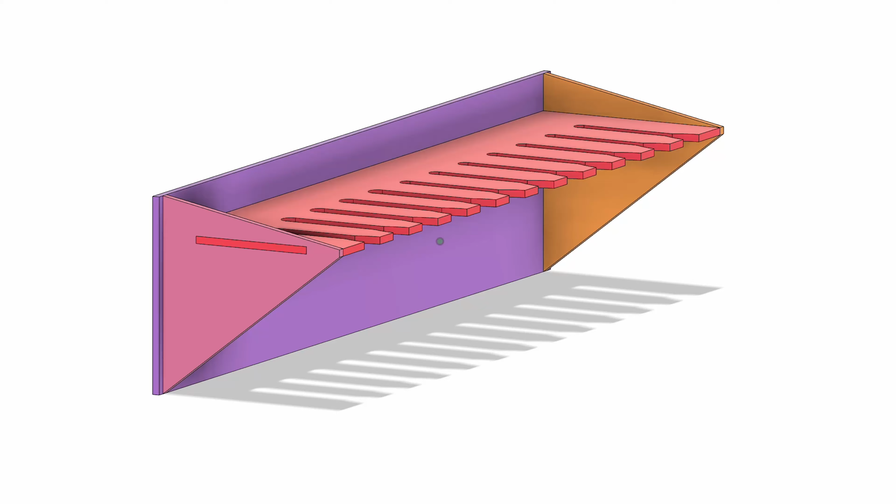In this Autodesk Fusion tutorial, I'm going to show you how to design a cable holder to cut on a laser cutter. We'll use parametric modeling features in Autodesk Fusion, as well as patterns and other techniques to quickly draw and then model a 3D form that we will lay flat for laser cutting.

The first thing to do is remember rule number 1 in Fusion: create a component. Select Create, New Component, then label your component. I'll call this Holder. Notice that now the component is activated.

I'll create a sketch and select the ground plane. I think it's easiest to use a center rectangle, so I'll go to Create Rectangle, Center Rectangle. That way, if I select the origin in Fusion, I can drag out and it's automatically centered.

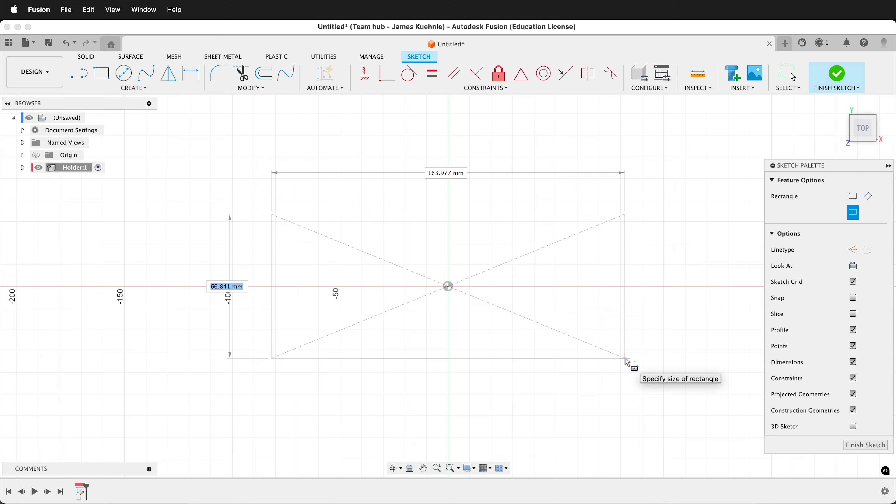I can type in some dimensions. For the depth of the rectangle, I'm going to make this 80. And for the length, why don't we start with 400? We can always change these dimensions later.

Next, I'm going to set a user parameter. Go to Modify, Change Parameters, click the plus button, type in Ply, then use 3 for 3 millimeters, and press OK.

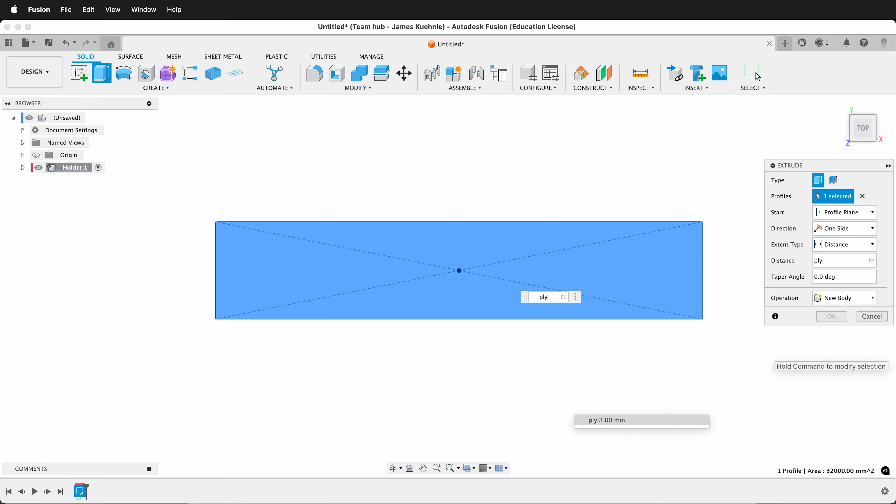Press E for Extrude. It's already selected, and for the distance, let's type Ply. Now we have a board that we can cut our slots into for our cable holder.

Now I'm going to create a new sketch, which will be used to cut out all the slots for the cable holder. Select Create Sketch, and instead of selecting this face, because this face might change, I'll select this ground plane. So now I can press P, project the geometry of the base plate, and press OK.

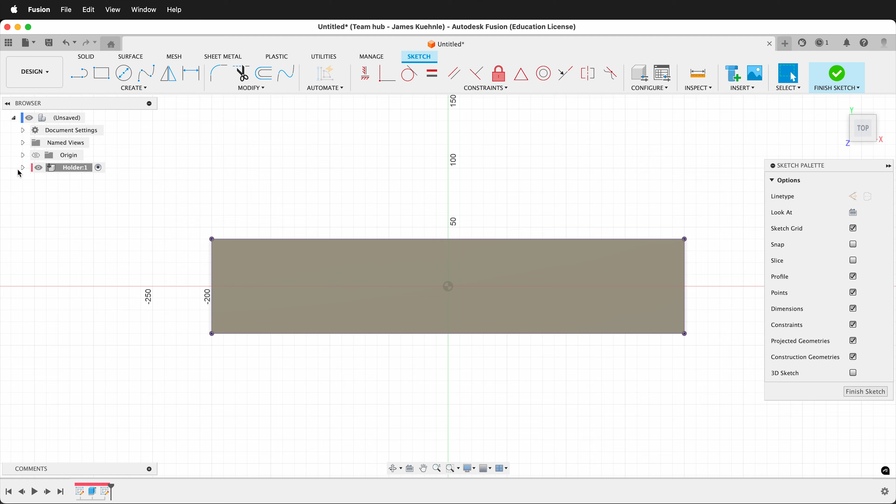If I look in my holder component, I can twirl out the bodies and hide the body, and I still have this geometry. Sometimes this is an easier way to work in Sketch. There's no correct way to model in Autodesk Fusion, but this can be an easy way.

Press R to get a rectangle and draw a rectangle. It doesn't matter what size yet. Now we can dimension it by pressing D, and here I'll type 40.

And for this width, for the first one, I think I'll do something like 7.8. We can always change it. This will be for larger cables and other cords. You should measure the cords and cables you have a lot of, and then type the dimension in for this.

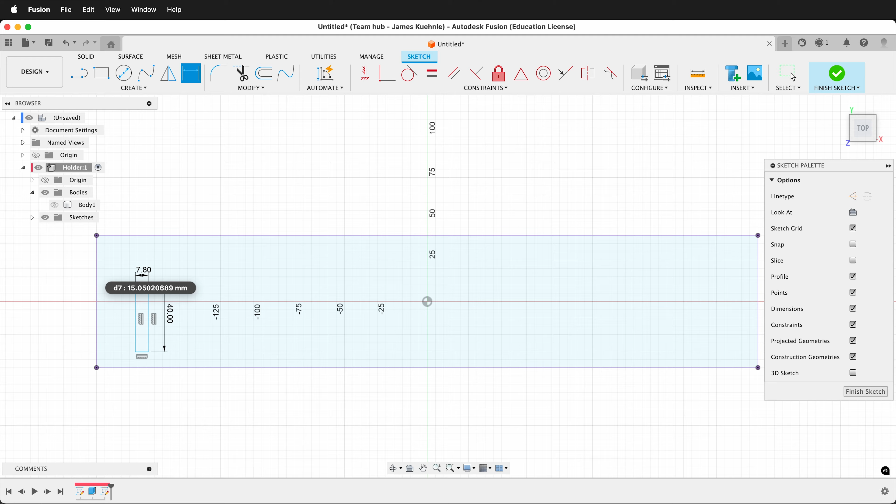We also want to add a nice rounded arc here. Go to Create Arc, 3-point arc. I'll select this point, then this point, and bring it up here. You can see it's locking to tangents.

But if you forget and don't lock it to the tangents, you can simply press Escape, click the tangent constraint, select the arc, and it'll automatically be tangent.

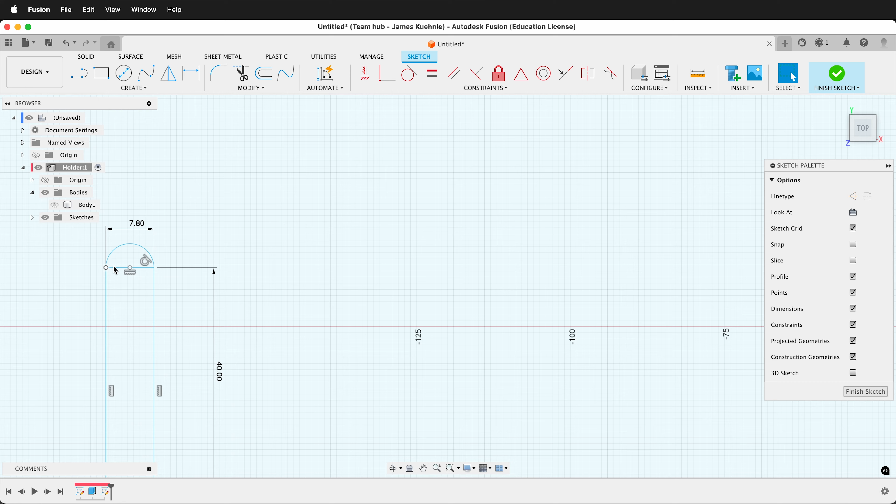One nice trick: select this line, then press X, and it will become a construction line. This is nice because we don't have to select everything. If this isn't a construction line, notice if I select, I can select these things individually and they don't connect. So select this line, press X, and it's a construction line.

I'll also do the same thing down here. Select this line, press X, and it's a construction line.

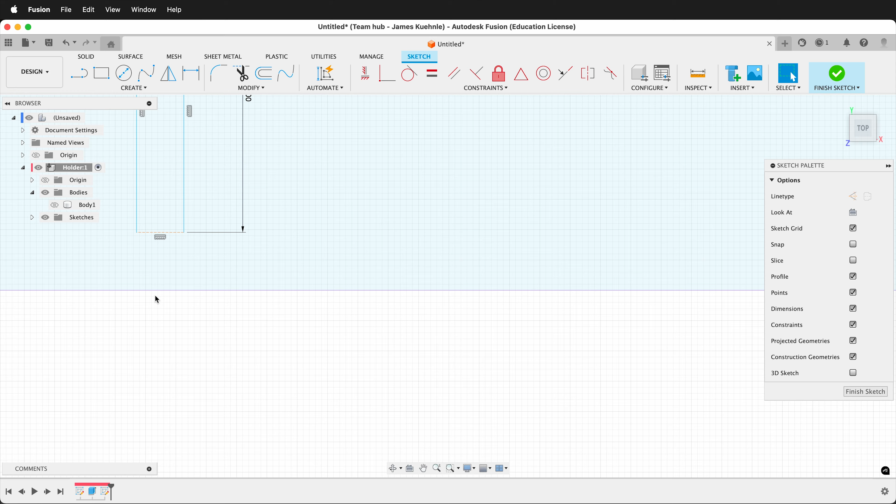Next, I want to add some sort of arc or opening so it's easier to put the cable in. So I'll create Arc, 3-point arc. I'll select here and then click on this line so it's coincident, and just put an arc there.

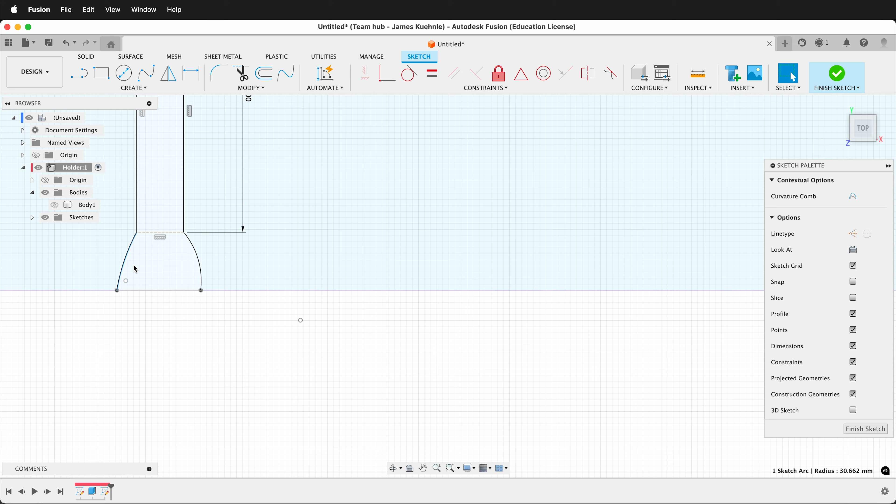Now I need to move these points so they look where I want them to be. Not exactly sure, so I'm just feeling out the design. I think this curve on the left looks better, so I'm going to dimension that radius, and it's 30, so I'll type 30 for 30 millimeters.

And then for this one, I can dimension the radius and click on this dimension, so now they'll be equal.

There's a couple more things I need to do. I need to decide this height. As I move these around, that can change, so I need to define what that height is. I don't think it needs to be that far. Press D, select this point, then this point, and let's make it 10.

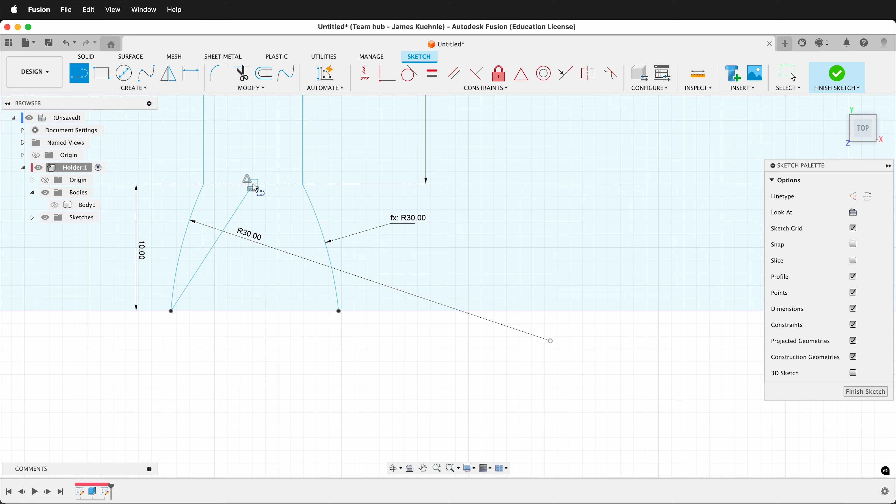Nice, 10 millimeters. And then we want to have these be centered. Many ways to do that. We could press L, draw a line from this point to the midpoint of that line, then draw a line from this point to the midpoint of this line.

We want to make these construction lines, so click each line and press X. Then with one of the lines selected, use the equal constraint and make them both equal. This automatically centers things, so now if I drag this along, that will center automatically.

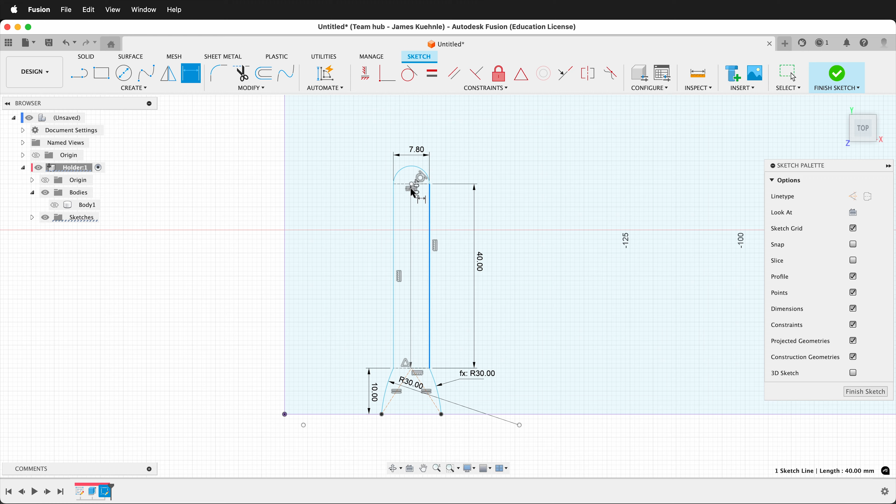So this is mostly fully constrained. If I press D, I can click this center point, the edge of the line, and type in 24 as a nice offset distance.

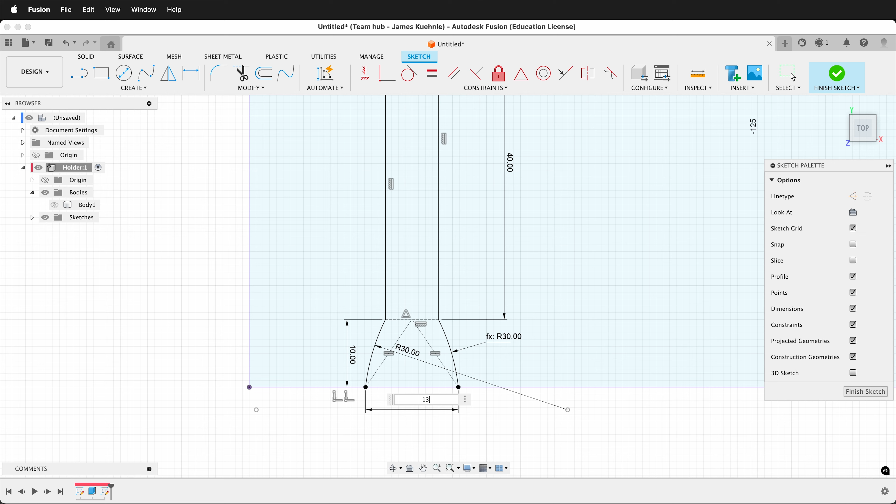The last part of the sketch to constrain are the two arcs. Notice that even though they're centered, I can still change the distance of how wide they get, so I'll put this to a reasonable width. Press D, select both these points, click, and I'll type 13 - about half an inch, which should be pretty nice for easy cable slide in.

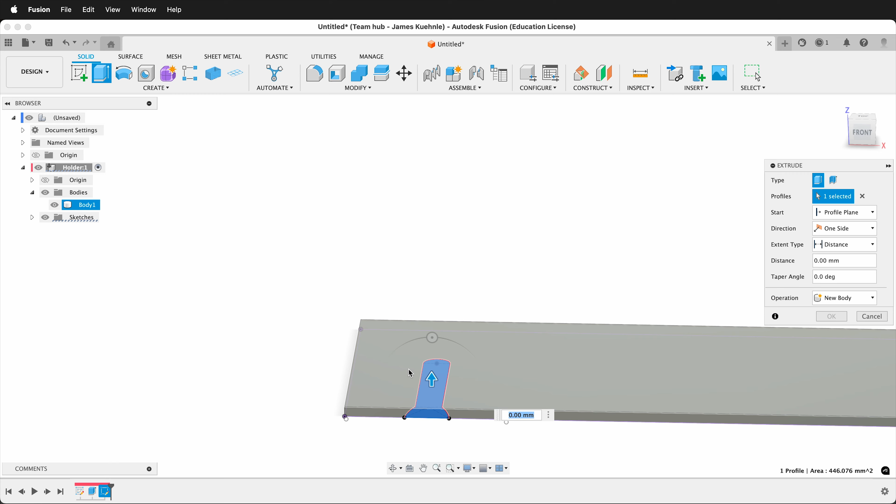Excellent, so now I have a slot for my cables. I'll finish the sketch, then re-show the body by clicking the eyeball in the browser. Press E. If you can't select this sketch because it's below, click and hold, then let go, and I can select that profile.

For the distance, I could type in ply, which works really well and updates automatically, or I could go the distance and say 'to object' and click the top here. Either way works fine, but I'll often type in ply because that way I know I'm going all the way through and it updates. I'll press OK - now I have a slot for one of the cables.

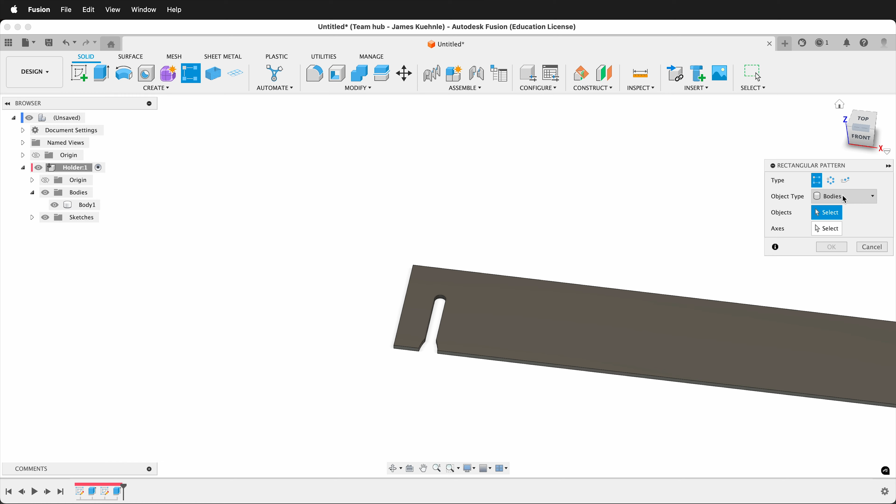Next, I'm going to create a pattern so I can have more slots. I'll select rectangular pattern, and by default it says bodies, but I want to select features instead. Then it asks me what objects - I'll select this extrude. Then it asks which axis I want to make the pattern on in Fusion.

So I can select this axis, and then I can just drag this way. I can create the pattern by going to extent, which means for whatever distance it'll put in the number of slots I want, or I can do spacing - this is selected right here. I'm going to do spacing because I know the distance from the center to here.

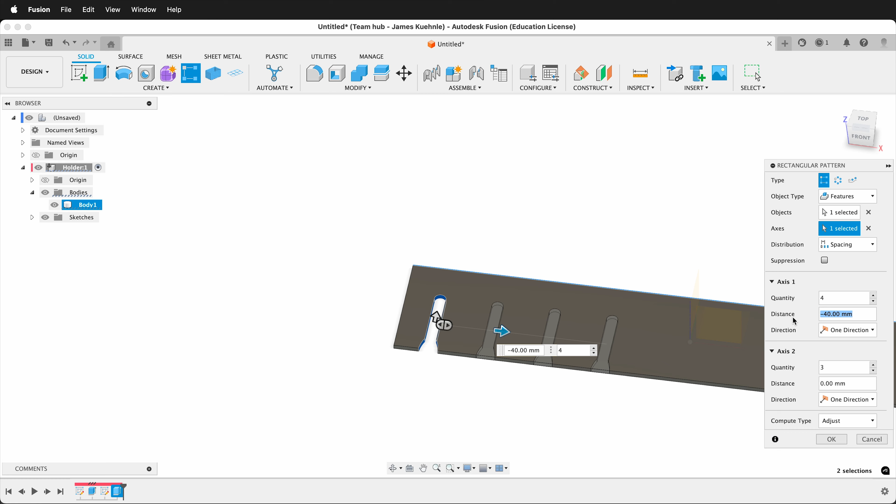For the spacing distance, I'm going to say -40. This should create even spacing. And how many do I want? I think 4 is a good number. Then I press OK.

I want to create something for smaller cables because some of the smaller USB cables might fall through this larger hole. So I'm going to create one more sketch, and once again I'm not going to create the sketch on the actual board - I'll create it on this bottom construction plane.

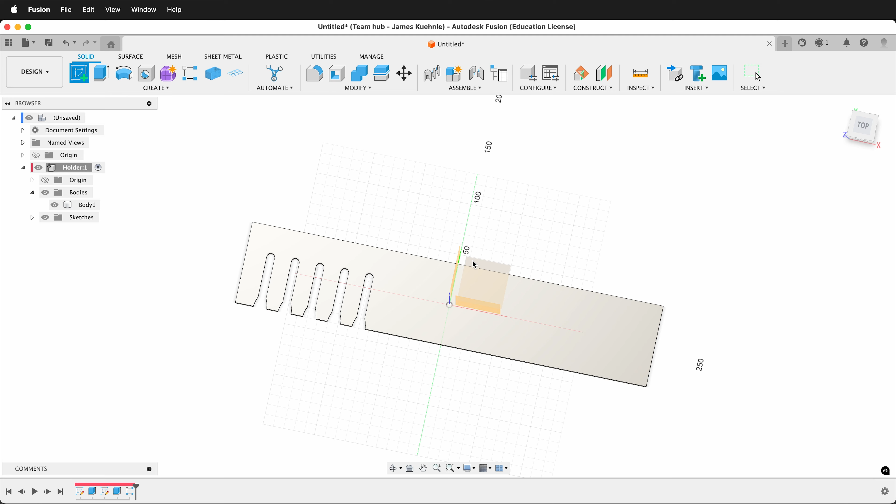Then I'll press P to project, and I'll select this geometry and say OK. I can then hide the body, and if you see here, all of those pieces came through.

I'm going to draw a rectangle, and this time I'll use some different constraints. I can use the horizontal vertical constraint to make this rectangle the same height as these pieces. I could have also given it dimensions, but this is just as easy.

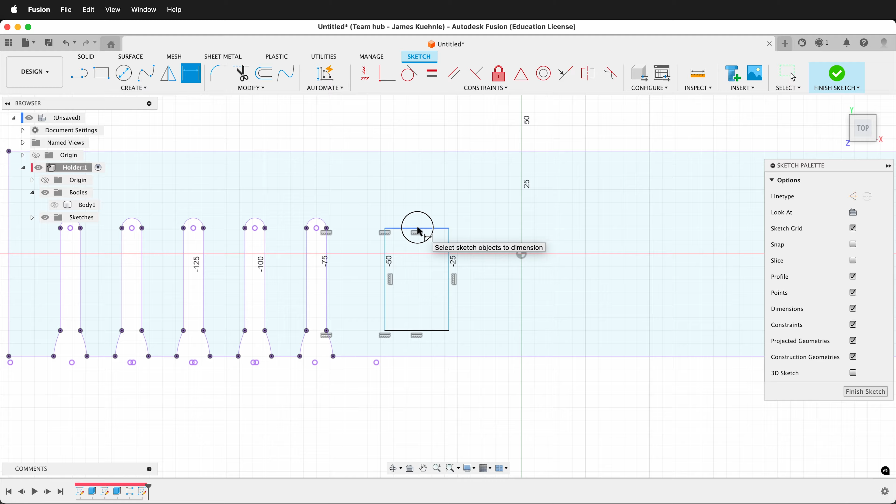Then I'll press D and give this a width. To make this smaller, I'm going to make it 5.5 millimeters. So let's see how it's just narrower.

Create an arc, 3-point arc. Click this point, then this point, and I have those both tangent. While the arc tool is selected, I'll go ahead and draw these arcs.

I'll keep the radius the same, so we'll type in 30. These could also be user parameters if you think you're going to use them a lot. We don't have to worry about this height distance because that's already locked in.

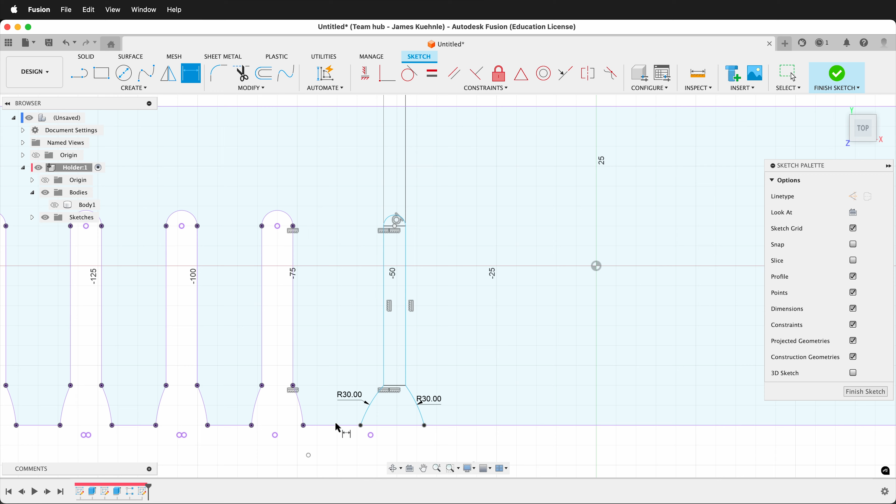We can set this distance - I believe we made it 13 before, so we'll keep it 13. And now we need to center them.

That's simple to do. Press L for your line tool. Draw a line to the midpoint, then one more line to the midpoint. Then we'll make both of these lines equal with the equal sketch constraint.

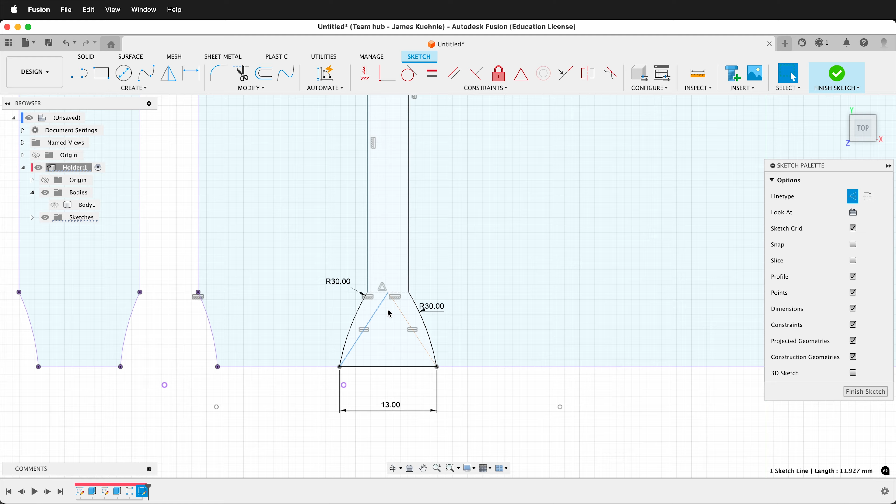Select these lines and then press X to change them to construction lines. Don't forget to change the construction line up at the top.

Now everything is constrained about this sketch except for its distance, but we already know our center distance. Press D, select this center, and type 24. Now that is the same center distance and it looks nice and even.

Finish the sketch, press E for extrude, select this face. We don't see anything to extrude, so let's go ahead and select the body to make it visible again.

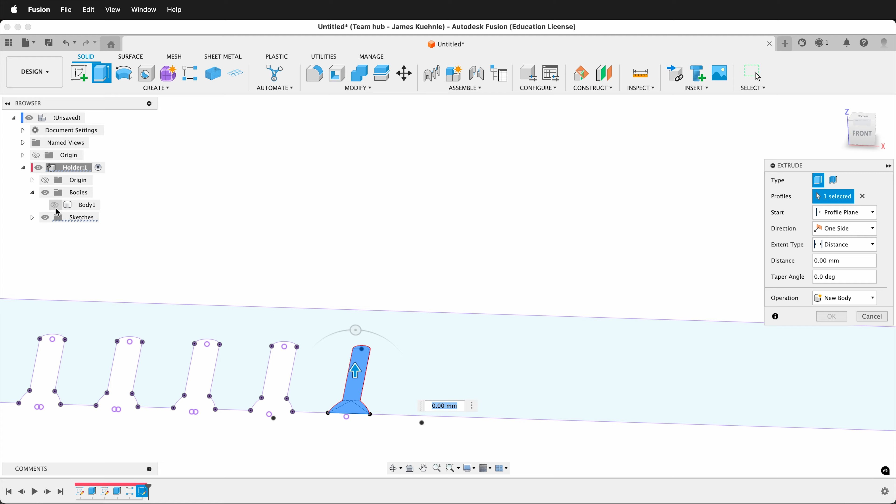This time I'll show you the other way. I'll type the distance as ply, then create a pattern, selecting features and the second extrude. The axis will be this one, in a negative direction. It defaults to spacing, and I'll set the default spacing to -24, same as before.

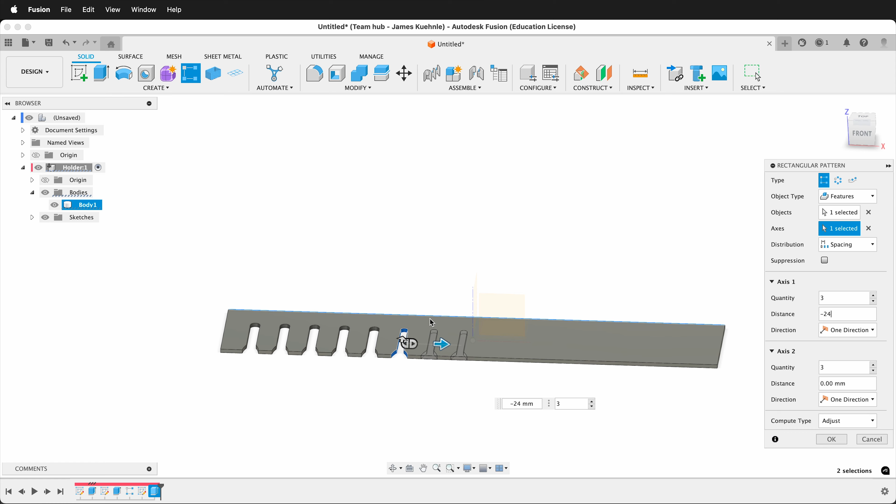I think I'll probably have a lot more smaller cables, so I'm going to increase the number of smaller cables to 7 and press OK.

My board is too long, but I can easily fix that. Remember, our distance from the edge to the center and from center to center is 24, so I can just count how many distances there are: 1, 2, 3, 4, 5, 6, 7, 8, 9, 10, 11, 12, 13.

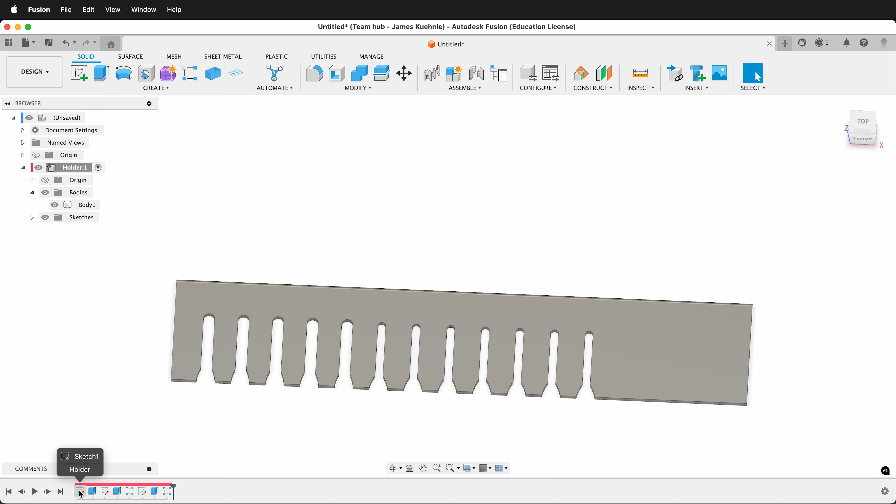If I go back to my original sketch, right click on it, edit sketch, and instead of 400, I can type 24 times 13. Finish the sketch. Often Fusion updates automatically, but in this case, you can see there's an error.

When Fusion updated the length, it kept all our dimensions the same. If I open this sketch, you can see it's still 24, but occasionally Fusion will have something flip.

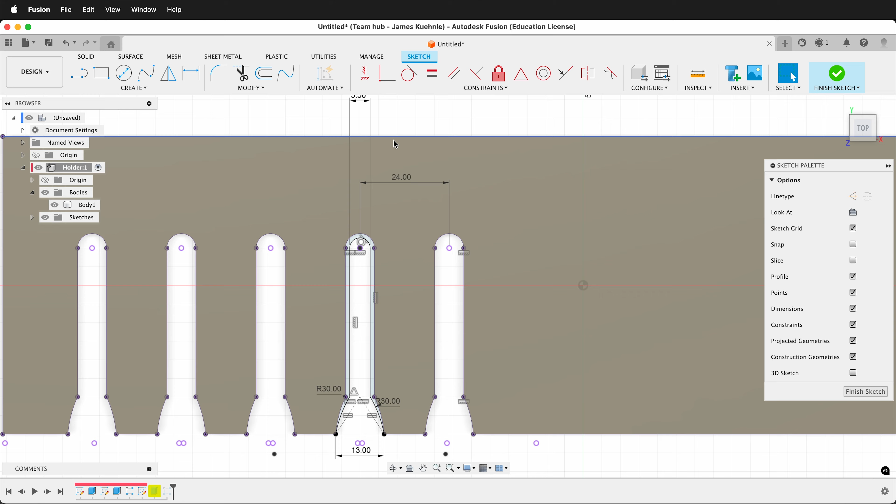So I'm going to delete that dimension, bring this over here, press D. I can once again dimension it from here and type 24, and that should take care of that. If I finish that sketch, now you can see everything is laid out fine.

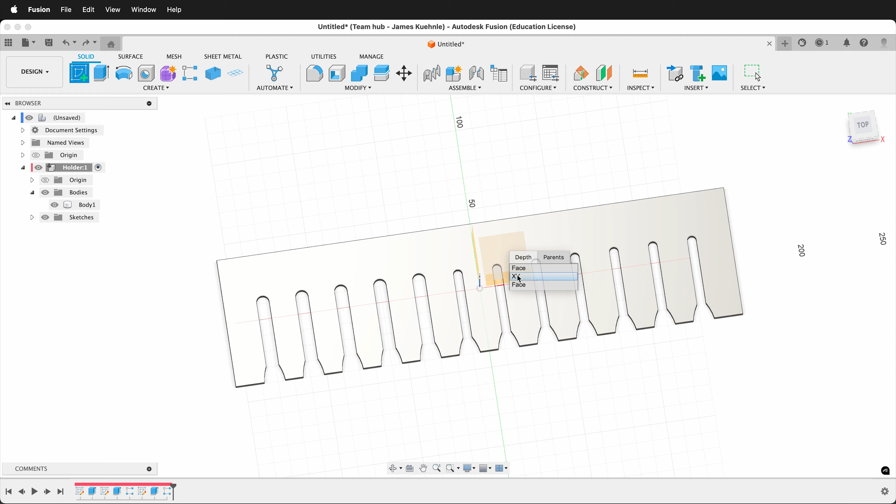I'll create a new sketch, again on this ground plane. If I select and hold, I can select the XY plane. I'll press P to project, which brings in all of the pieces. I can hide the body again so I can see clean sketching.

I'm going to add a rectangle on this side and a rectangle on this side. I think I'll add 2 rectangles, and then I can use the collinear constraint to make these two the same height.

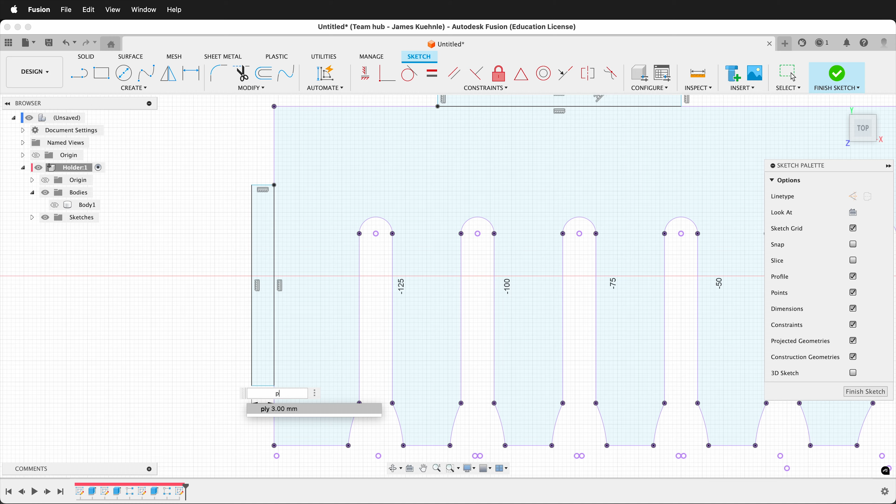For this one, I'll dimension it and type in ply, the thickness of our plywood. Same thing here, I'll type ply for the thickness, and I'll dimension this edge here as ply for the thickness of the plywood as well. For this side tab, I'll dimension it 50, approximately 2 inches.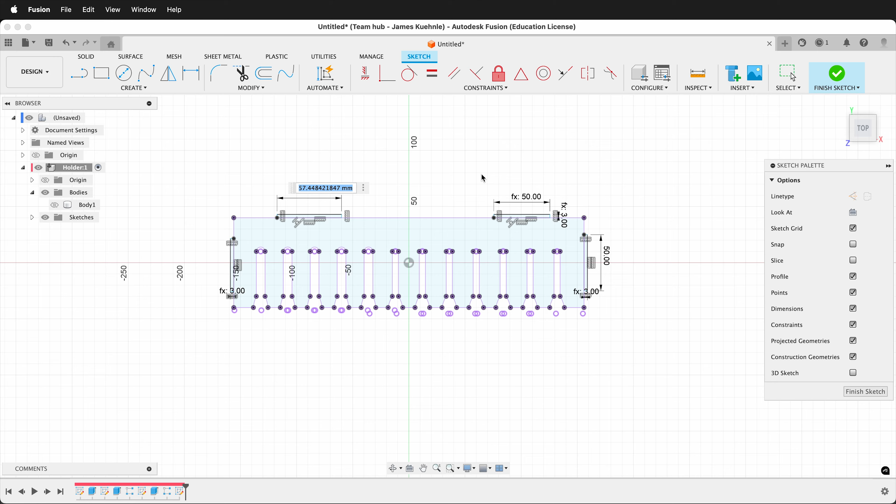I think I'm going to make them all the same, so I'll select this one, click this dimension, and it'll make it the same. Select this one, click the original dimension, it'll be the same. Select this one and the original dimension, and it's the same.

These ones are very easy to position because I can select the rectangle and then this line with the midpoint constraint, and it'll lock it into the center. This one here, I can select this line, and now it's locked to the midpoint constraint. Here I have to be a little bit more creative, and there are many ways to do this.

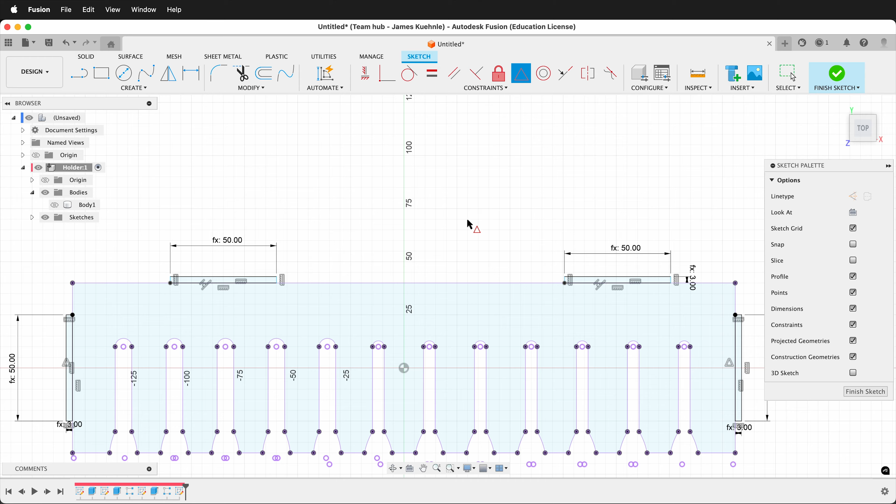One of my favorite ways is to select this line here, the top, hold Shift and get the midpoint, select here, go to the midpoint, press Escape to get your selection tool in Fusion. Click both of these lines and press X to make them construction lines, then select the equal constraint to make them equal.

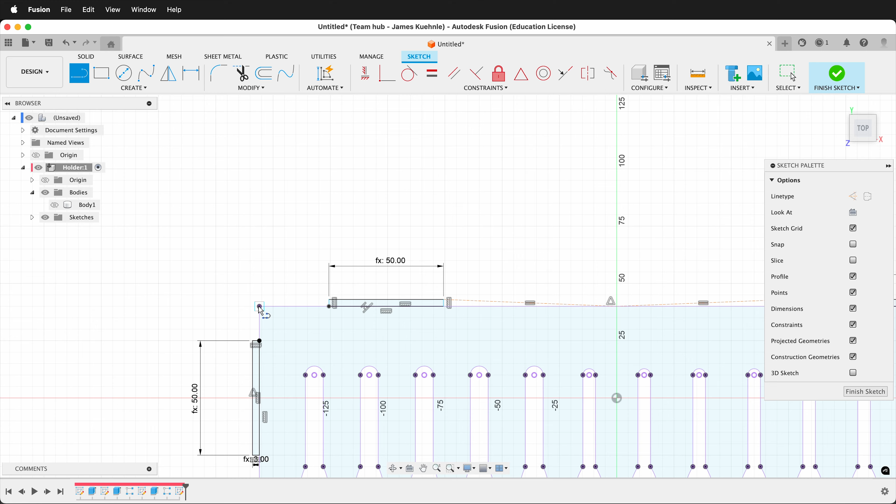We could automatically have it update by adding 2 more lines. If I press L, from this corner to this top corner, and from this corner to this top corner, select the lines, press X to make them construction lines, make them equal to each other, and then lastly make them equal to these lines.

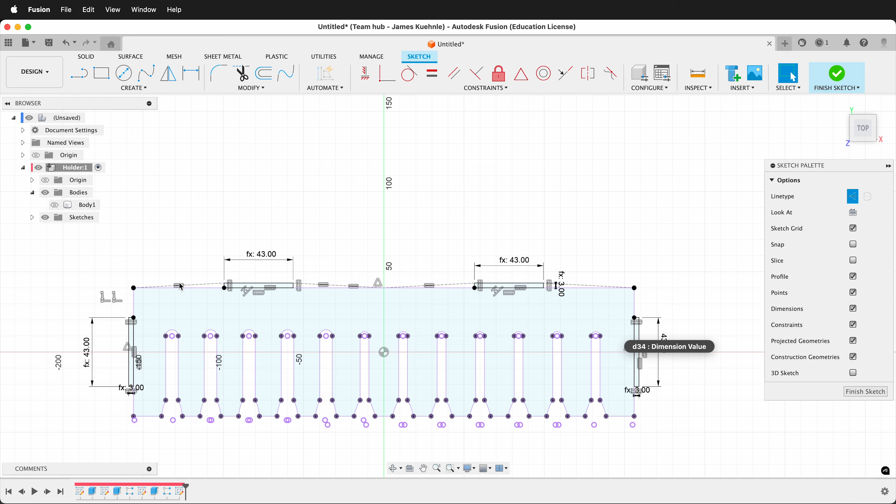Now, no matter what I do, these will automatically center. For example, if I change this to 43, these stay in the center. That's a really great way to quickly and economically use a triangle to center everything automatically. I'm going to change this back to 50 and then finish my sketch.

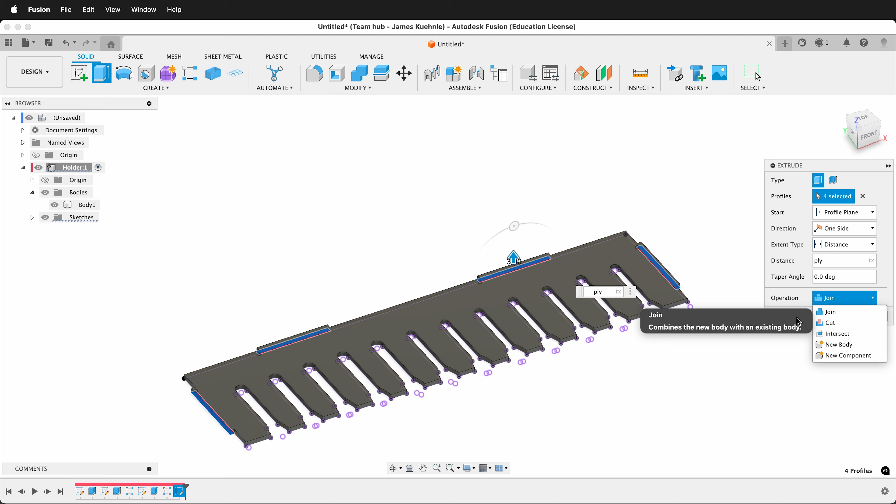I'll show the body again so we can see what we're going to do. I need to add those tabs, so I'm going to press E to extrude, select all these profiles, and the distance will be ply. By default it should select join, but if it doesn't, you can select join and press OK. We are now done with this first piece.

Go up to the top level component and select this little dot. If you have not saved your files, this is a good time to save. While you have the top level component selected, go create a new component. I'm going to call this back.

And now we're going to add a back support that'll go on the wall. Before creating my sketch, I need to set an offset plane. Select offset plane under construction planes.

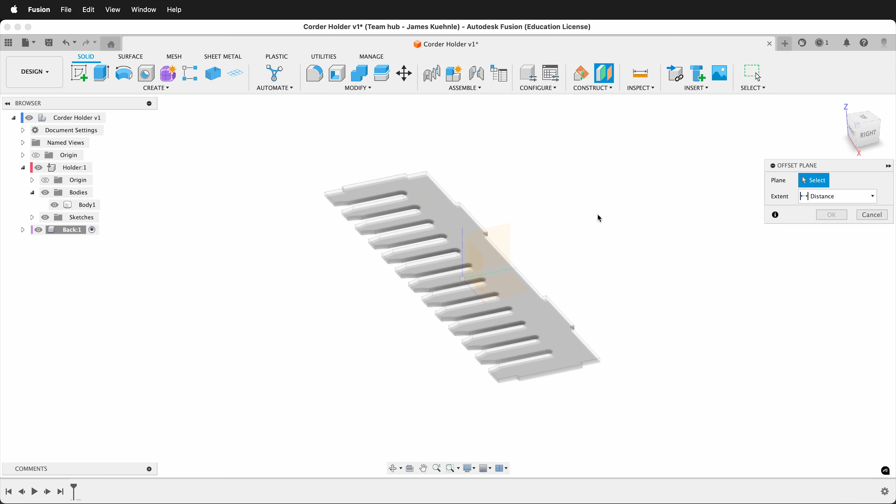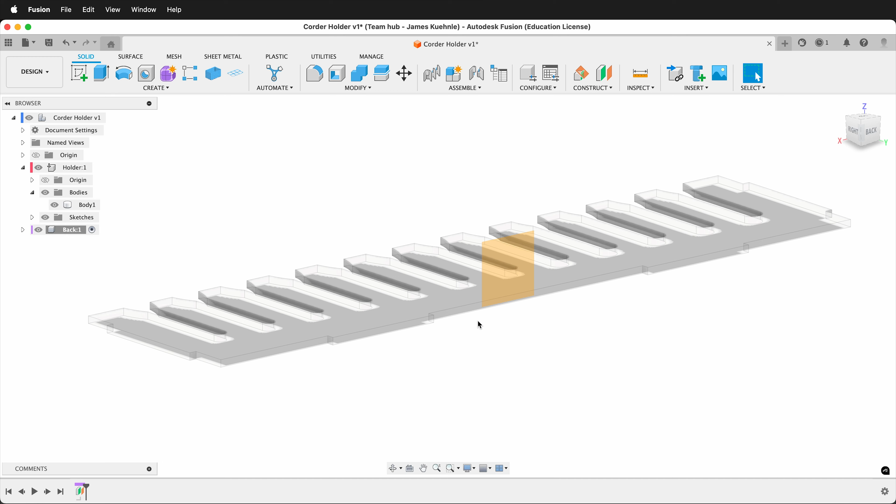I'll select this plane and go out this way. What is the distance? The distance is 80 divided by 2, because that is how wide this is. If this was a user parameter, I would type in depth, but we're just using standard numbers right now. Then I can press OK. So now I know that is right on there, and this won't change, whereas this could potentially change.

You always want to reference the origin whenever possible. I'll create a sketch, and my sketch will be right on that plane. Press P to project. Make sure you have the purple selection filter for entities. And for this, I'm going to select this face right here.

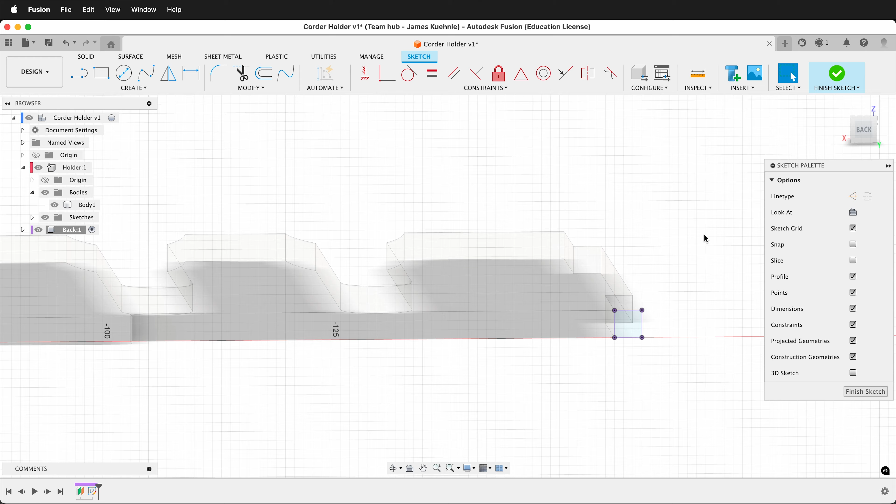You can see how that projects in. And then I'll select this face right here, and that's all I need. I can press OK. I'll make sure I'm looking straight from the back, and I can hide the body so I can see what I'm doing. I'll press R for a rectangle, and I'm just going to draw a rectangle that's bigger.

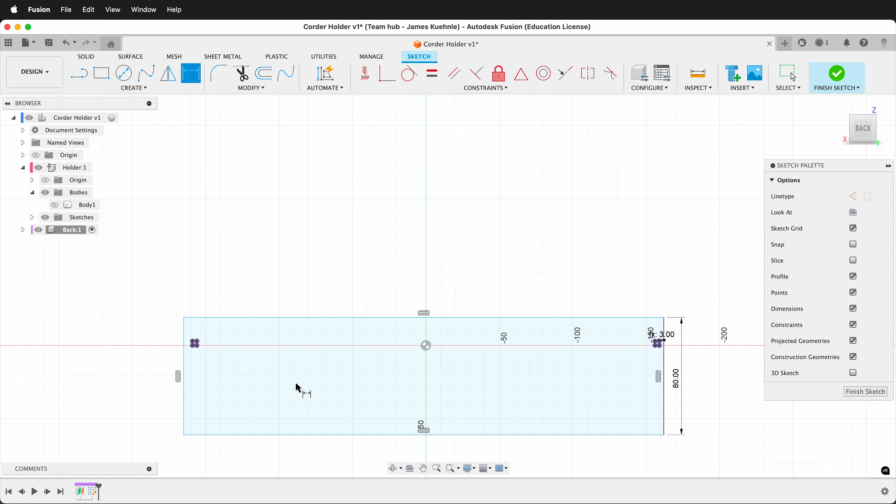I'll give this dimension of 80 so it matches what we had before. Then I can easily make this a similar length by just clicking here, and I think I'll type ply just to give that a little bit of strength right on the edge there. Then over on this side, I'll do the same thing from this edge to this edge. I'll type ply. And then for the top, I just want a little bit of space up there, so let's type this as 15.

I'll finish my sketch, and this time I'll go ahead and show that body again. But remember, we're in a new component. This is back. And I'll press E to extrude. Notice since we didn't make these construction lines, it doesn't extrude there.

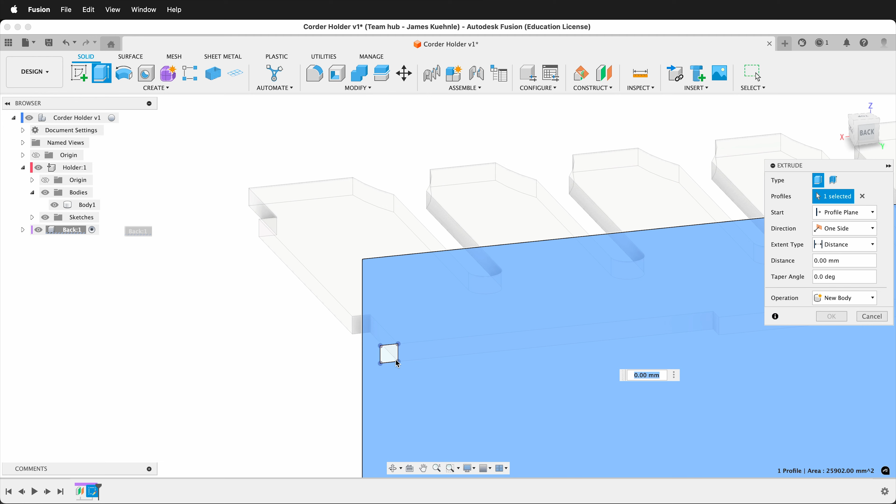So make sure you click these two little squares. You could also make those construction lines so it selects the whole object. Now I'm ready to extrude. Pay attention to which way the arrow is going. I want to type ply and then press OK.

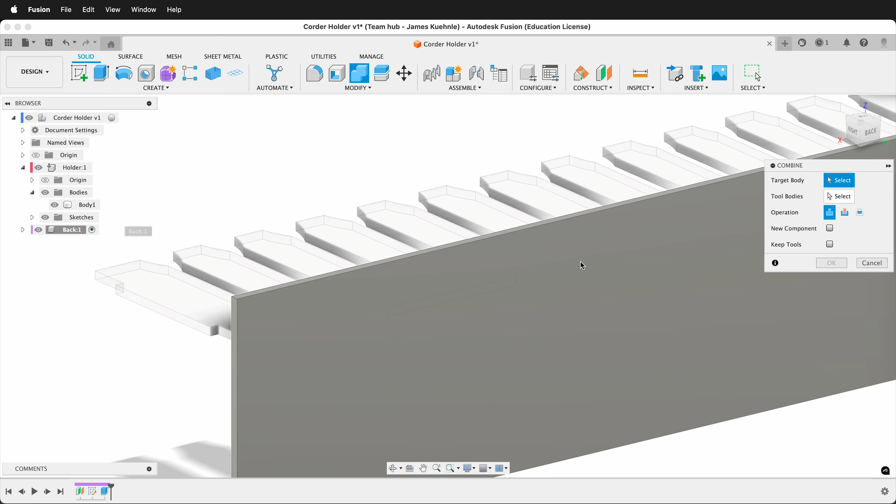This is great, except now we need to cut out these holes because we want these tabs to go in. So I can click the combine tool, use this as my target body. This is my tool body. The way to remember that is, what is the cake? This is the cake, this is the knife.

I want to use cut, and I want to keep my tools. I want to keep my knife because I don't want to lose this piece. And I press OK. Now you can see it has those slots cut out.

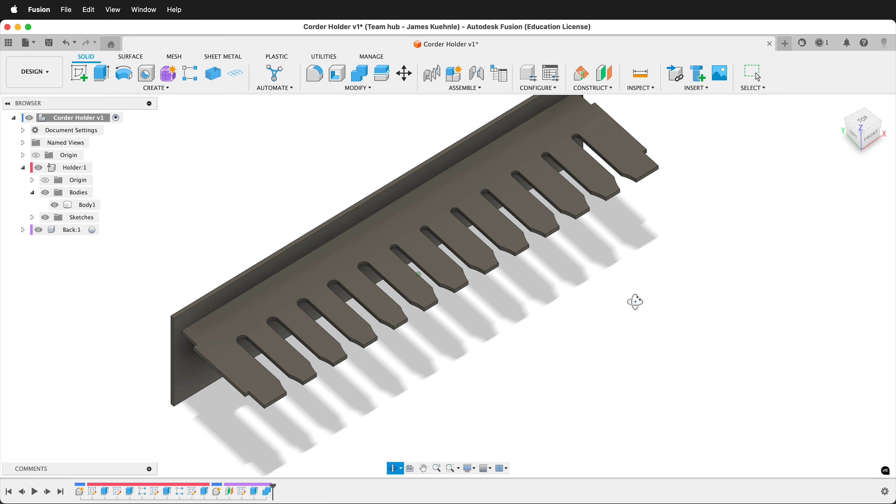Next, go back to the top level component by clicking this little dot in your browser. In Fusion, everything is the same default gray. We can help understand what's going on by clicking Inspect, Display Component Colors. Autodesk Fusion then selects some random colors so we can tell that everything is a different component. If yours are the same color, you likely have two bodies that are either in the same component or not a component. So make sure that before you create your bodies, you create a component and are working in that component.

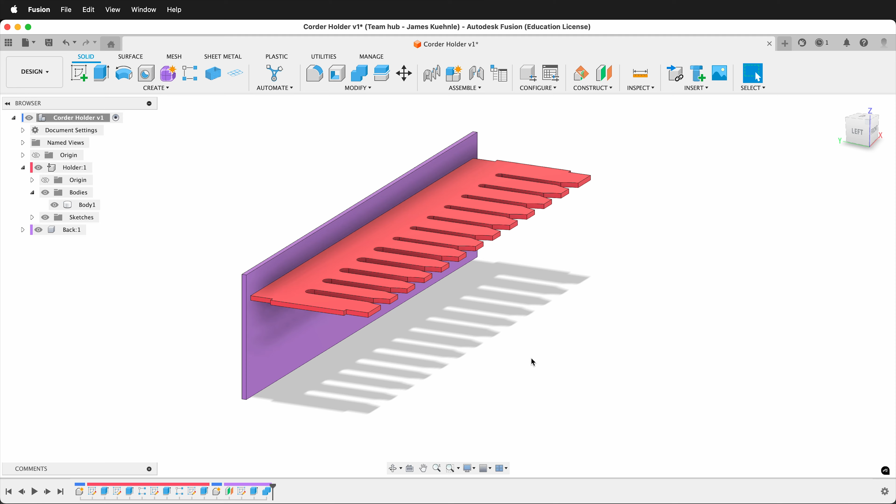For our last piece, we need to make a little structural triangle on the bottom. I'll create a new component and call it support. And I need to create a sketch. I'll create a sketch right on this plane here.

And then I'm going to press P to project in. I need to get a few points. Make sure you have the purple selection filter. I'm going to select this edge, this top edge, and this bottom edge, and press OK.

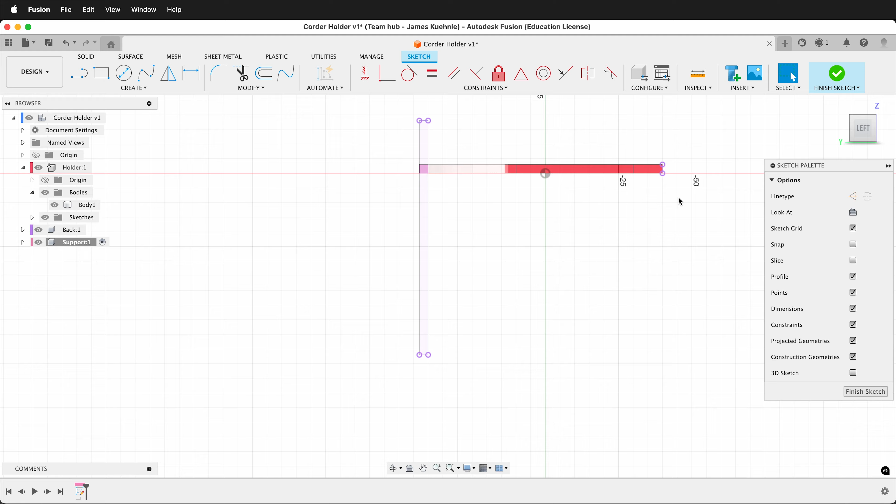Now I'm going to draw lines to make the triangles. I'll draw a line from here to here. And then I'll draw a line from here to here. And finally, I'll draw a line from here to here.

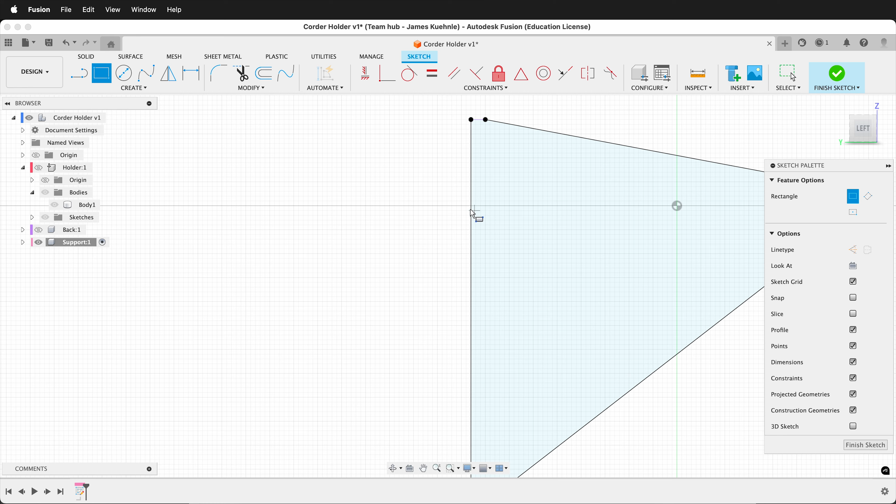I want to create a little slot on this holder. So what I will do is hide the other two components so I can see easier. Press R for a rectangle, and I'll draw a rectangle right here. Then I can press D to dimension this rectangle at 50.

To center the rectangle, I can use the midpoint. Click the midpoint of this, then click and hold, and select the sketch line that is the rectangle. That should put it right in the middle. For the distance, click this line and type ply. And then I'll draw some lines right here and right here.

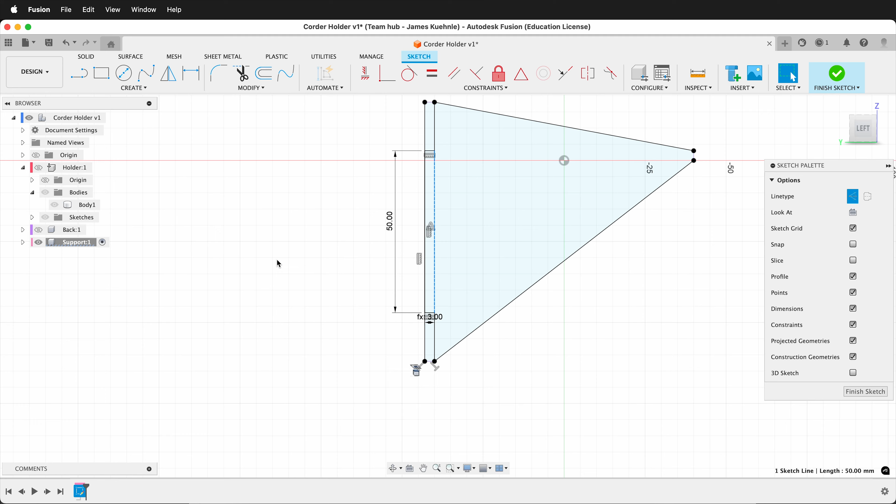Press Escape, select this line, and make it a construction line. Now I can select this piece right here. I'll finish the sketch and bring back the other pieces so I can see what's going on.

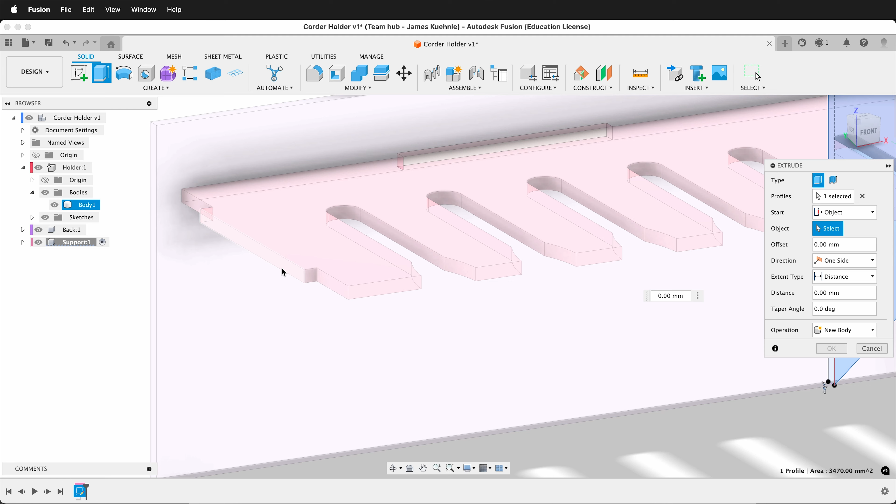Now I need to extrude this. I don't want this piece to be here, I want it over here. So if I press E, select the profile, this time the start will be from an object. I'm going to start directly from this object on the edge, go this direction, and the distance will be Ply. Now you can see that piece is perfectly located on the edge right there.

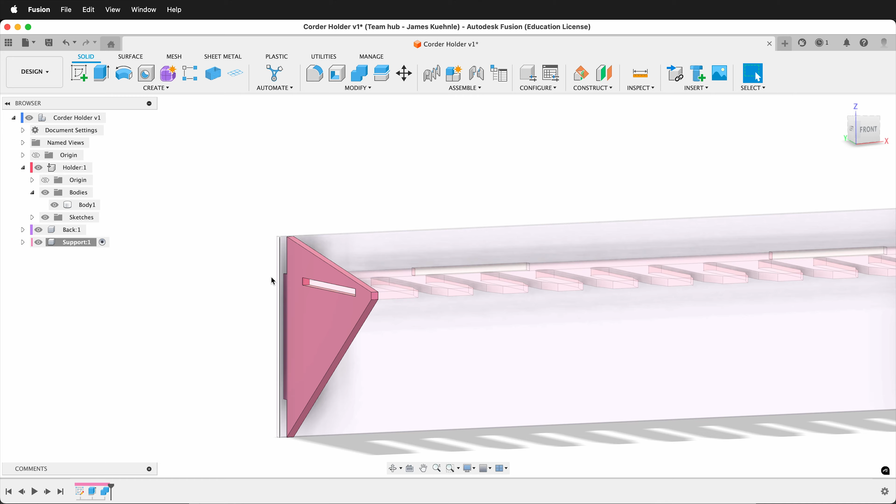Press OK. Now I need to do a combine operation to cut this out. Select Combine. Remember, this is the cake. This will be the tool. I want to keep the tools and press OK. So now that slot goes right in there. But I really want to have a piece on the other side as well.

So I'll go ahead and select the top level component, and I'll create a mirror. I can select components, and the object will be this component. The mirror plane will be the center plane, and now this component is over here. If I press OK, you'll notice I have a new component that mirrors that one.

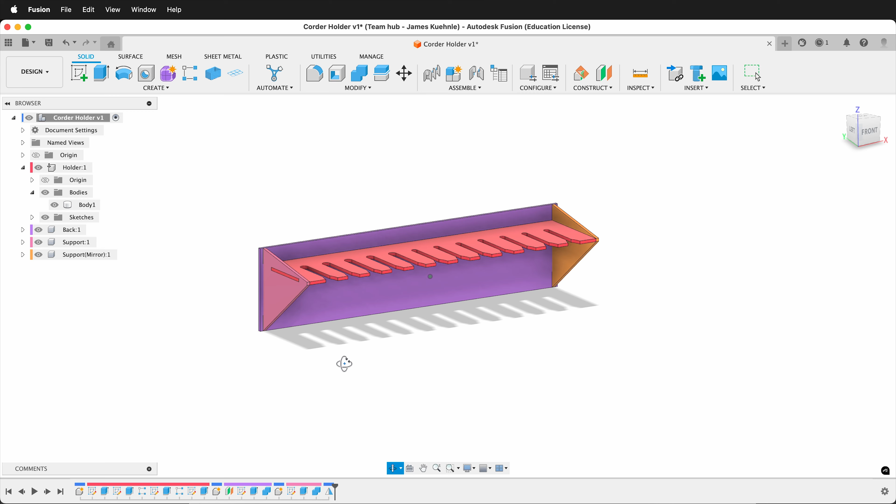But notice that I don't have it cut through this back plate. That's simple enough. While I'm in the top level component, press Combine. This is the cake, I have two tools now - this one and this other support on the other side. Press OK, and now I have everything cut through.

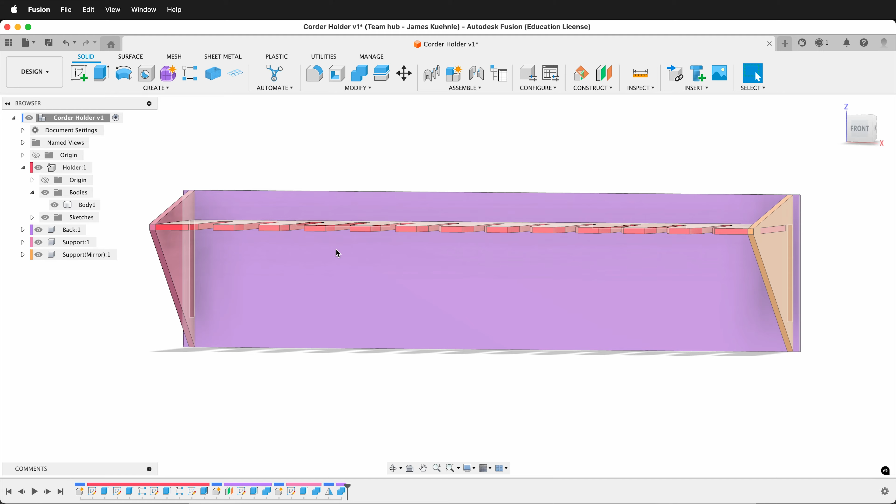We probably want to have some screw holes so we can attach this to a wall. Let's activate the back component, that's the purple one in my Fusion file. Select this little dot to activate it. Let's create a sketch on this back plane. Press P, select this face, then press OK. If you can't see what's going on, we can hide the body in the back component.

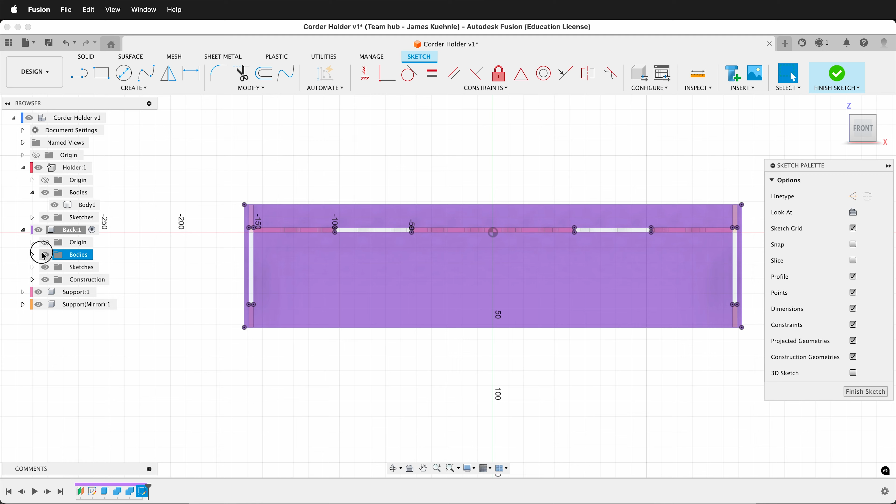Press C, and let's draw some circles. I could draw one circle and make a pattern, but sometimes it's just as easy to draw 3 circles and make them equal. It depends on what design you're trying to do. For dimensions, I'll press 9 for 9 millimeters, so I can use a nice hefty wall screw to put that on.

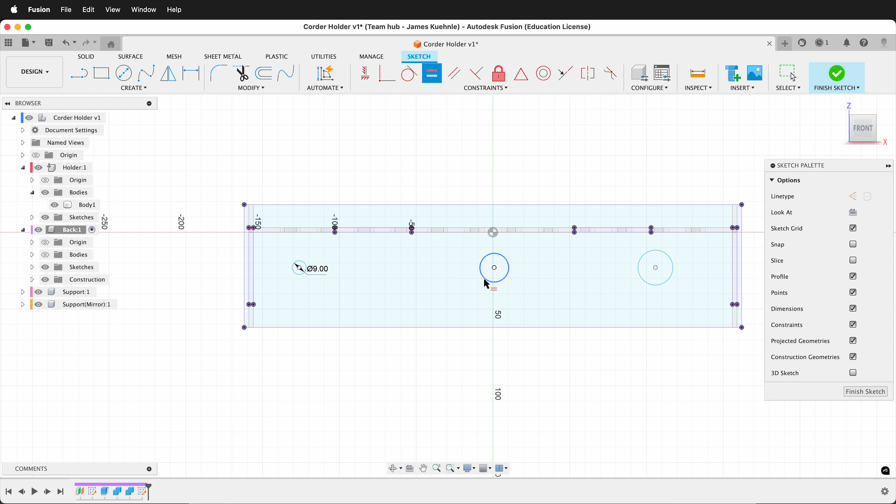I'll make each of these circles the same dimensions by clicking equals, or I could dimension them. I'll use the vertical and horizontal constraints, clicking each of these dots so that if I move them up and down, they move together. If I press L, I can draw a line to the midpoint, another line to the midpoint, press Escape, select both lines, click X to make them construction lines, and make those lines equal.

For this circle, we can use the vertical constraint to center it over the midpoint. For these two, we can use one more triangle by pressing L down to that point, L to this point, press Escape, click X to make both of those lines construction lines - something that will keep these in the middle.

I'll use the horizontal constraint, select one of the points, hold shift - that'll show the midpoint on this far line. Now we have everything locked in. I probably want to have these a little bit farther apart now that I'm looking at it, so I'll go ahead and delete this constraint.

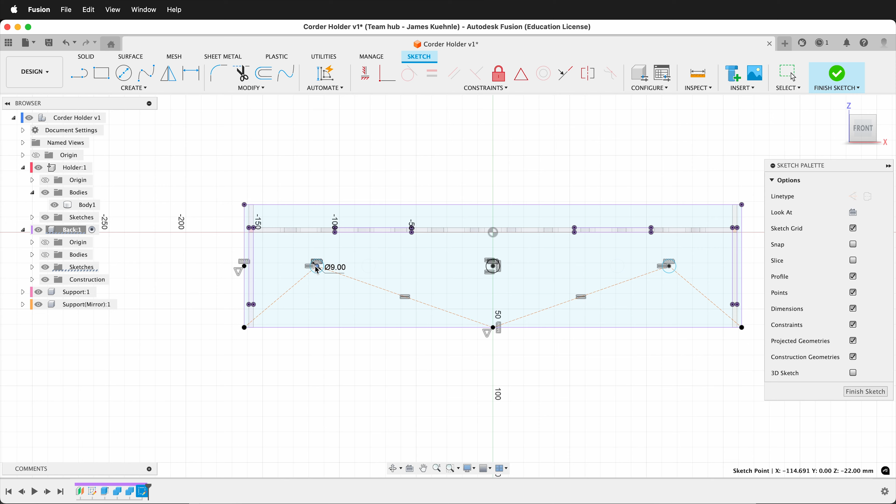Now I can go ahead and move these over, and I'll think about how long this line is. I'll say D, and let's just make this 50. So now those are farther over on the edge.

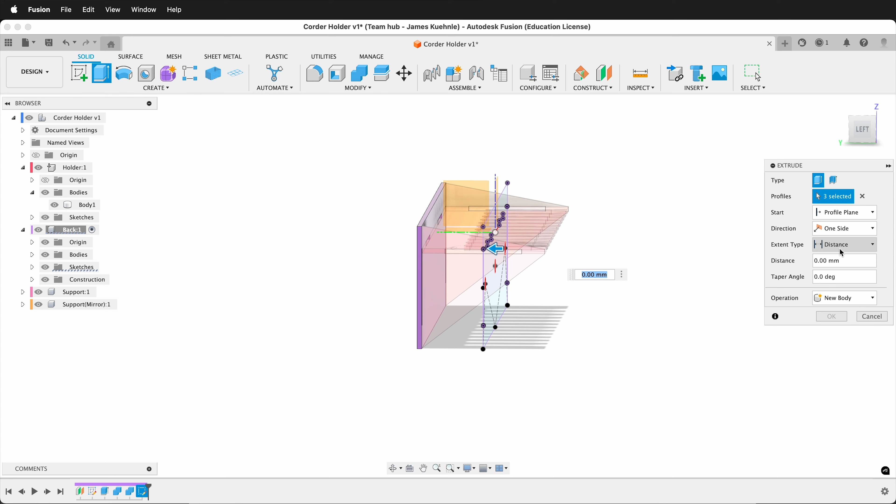Finish the sketch, press E, select all of these circles, show the body again so we can see which way we are going to extrude. In this case, we need to go farther than where we are because our sketch is over here, so we set our extent type to object and select this back face. Notice they go like a laser beam, and then we'll cut and extrude through here.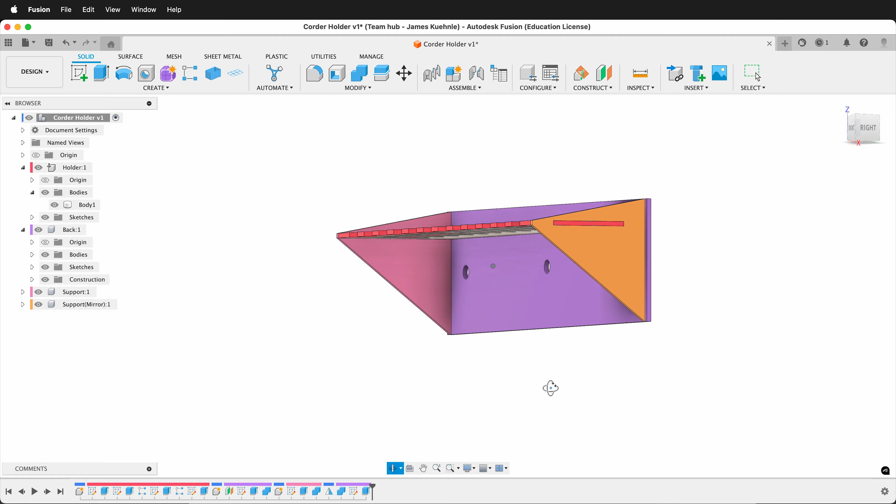Press OK, click on the top level component. Now we have a model that is ready to cut out on a laser cutter that will hold all of our random cables and USB cables. Hopefully you can make your own designs. This is easily modifiable, and then cut it out on the laser cutter. Happy 3D modeling.